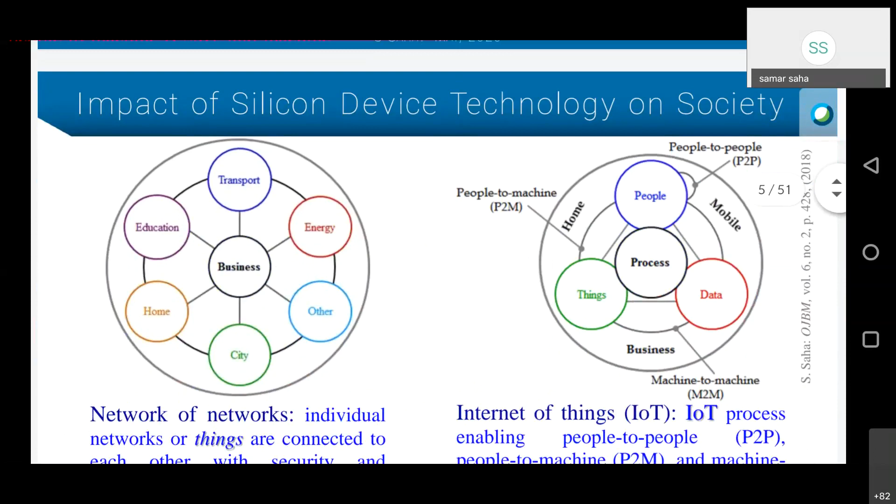So next page. This shows the impact of silicon devices on society. You see that the main theme is business. So business is connected to transport, to energy, then education, home, and then cities, smart cities. So all these things are interconnected. So we have a network of networks connected to the business and all important items, and that created Internet of Things or Internet of Everything.

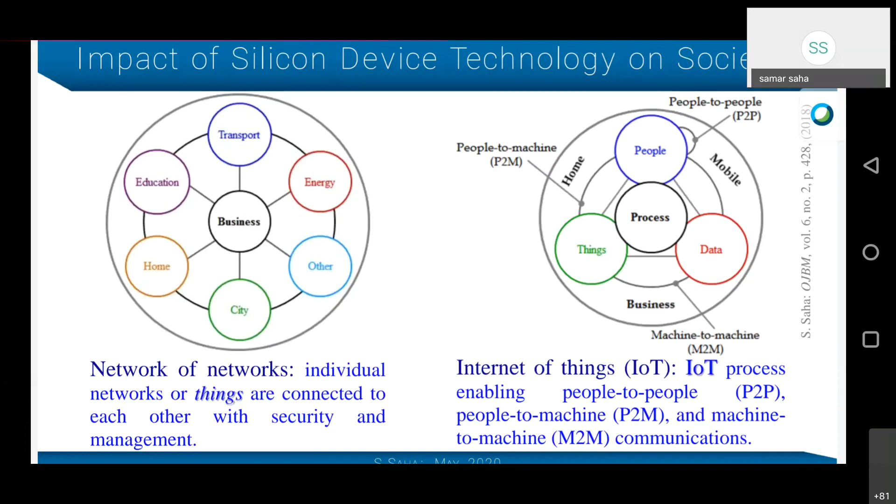So on the right hand view of the plot, we have process in the middle, then people, data, things. And it is connected to home, mobile, environment, and then business. So we have people-to-people communication, then people-to-machine communication, and then machine-to-machine, that means data and things, their communications. All these things started, which created, next page, an integrated smart environment and integrated ecosystem.

So just sitting on the smartphones, we can connect to any of these things. So this is a smart environment and integrated ecosystem. So all these are contributions of this silicon technology.

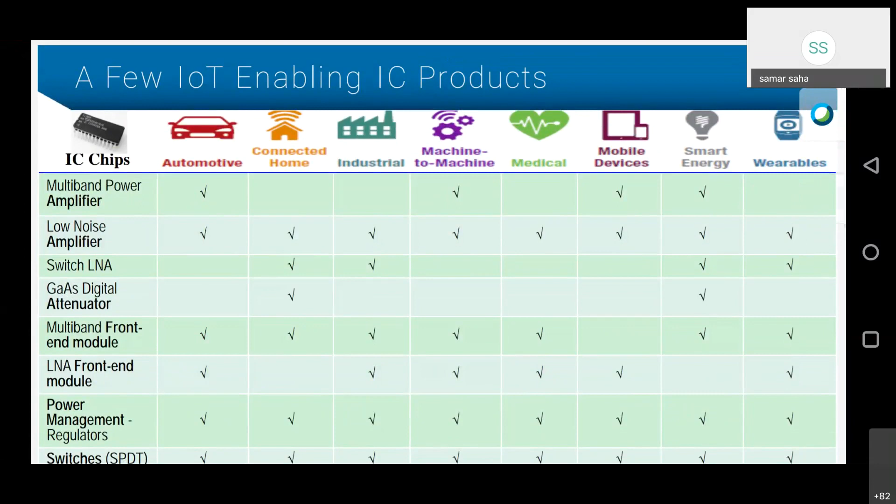Next page shows a few IoT enabling products. This is just for illustration only; there are hundreds of products. It says what are the IC chips that are used for automotive, then connected homes, that is smart homes, then industrial applications, machine to machine, then medical, then mobile devices, smart energy, and wearables. So these are all contributions of IC chips.

Though we talk more about Facebook, Google, the heart of these is the left-hand side, the IC chips column. That is, for automotive, what are the things that we need? Then for wearables, you have low noise amplifier. So these are all silicon technology, and then circuits and systems. These are few examples; there are 100 plus. So we can go through all the products coming out from the IC fab, and the circuits and systems design.

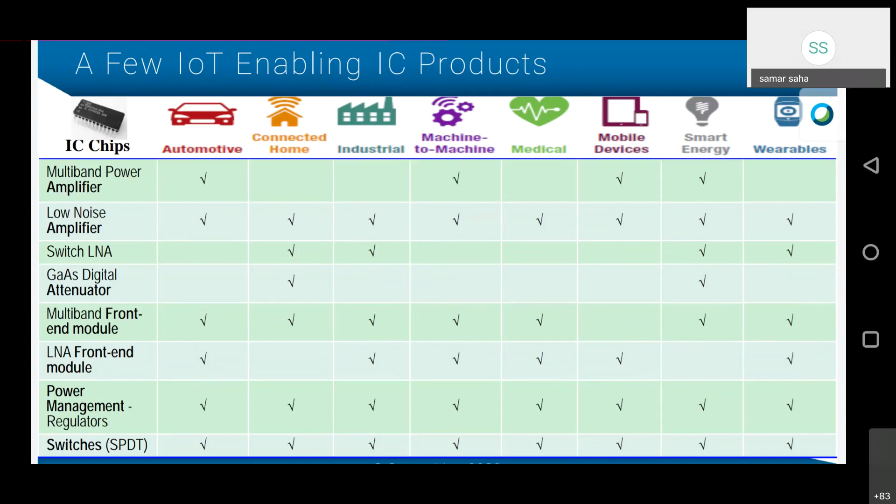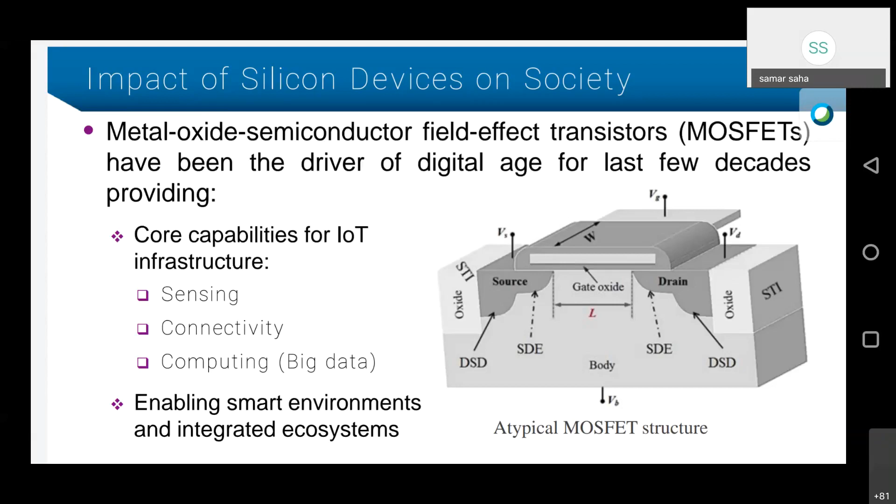On the next page we show that we are finished with that. Then we see what challenges these silicon devices are facing right now to continue the growth of the products for digital media. So on the next page we show

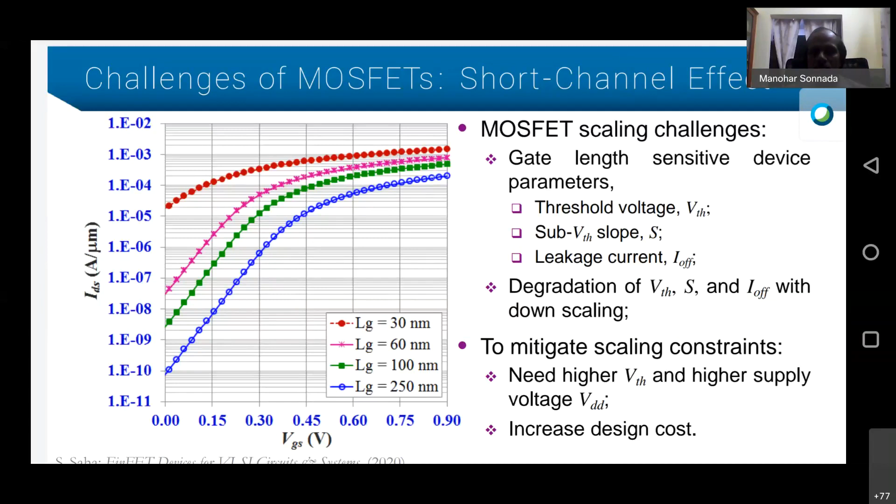To mitigate these scaling constraints, we need a higher threshold voltage so that we can control leakage current. That means we have to use more doping, and a higher threshold voltage means we have to increase the supply voltage, VDD. More doping is another problem, which increases design cost. A higher supply voltage means we will increase power consumption. Let's continue on the next page.

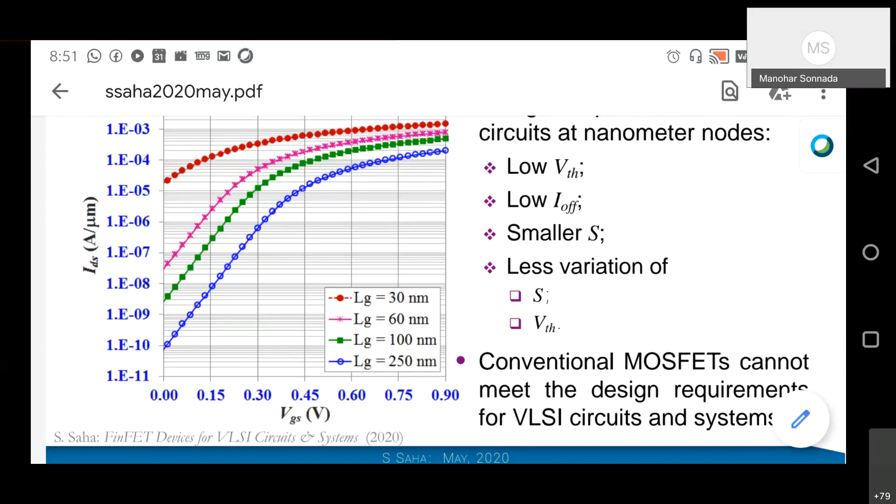So here we see that under those circumstances, with increasing channel length dependent parameters, MOSFETs cannot meet the design challenges. For design, what we need is low threshold voltage, low off-state leakage current, smaller subthreshold slope, meaning the swing should be very fast, and less variation of subthreshold slope. So conventional MOSFETs cannot meet the design requirements for integrated VLSI circuits and systems. So on the next page we show.

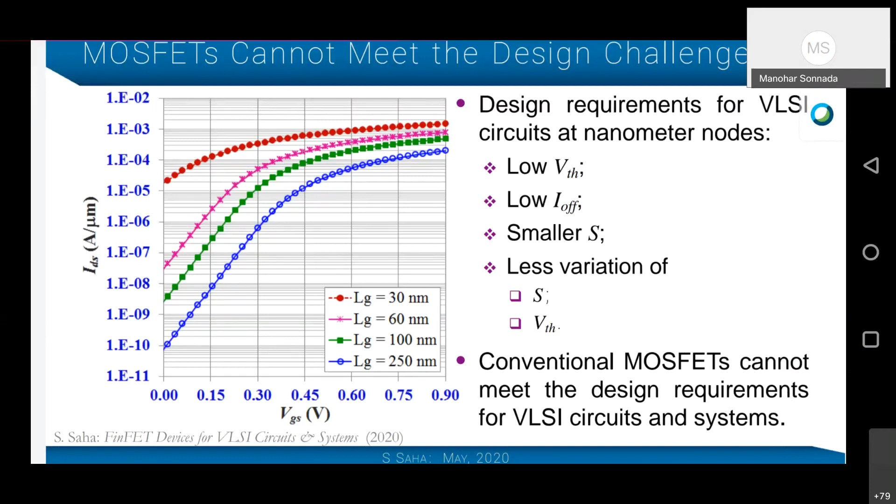So this page basically continues on the same theme. It shows why there is off-state leakage current. The gate is losing control in smaller devices because of the coupling between drain and channel, since the source and drain are in close proximity. As a result, CDSC, the drain to channel coupling capacitance, becomes dominant.

Sometimes it is comparable to the gate oxide capacitance, so the gate is losing control, and sometimes it could be higher. As a result, the gate loses control, and because of drain control we directly have higher leakage current. As we can see, the 30 nanometer device is basically a kind of resistor. We don't need any more gate voltage; just using drain voltage, we can turn on the transistor. So this is just a resistor. So the next page.

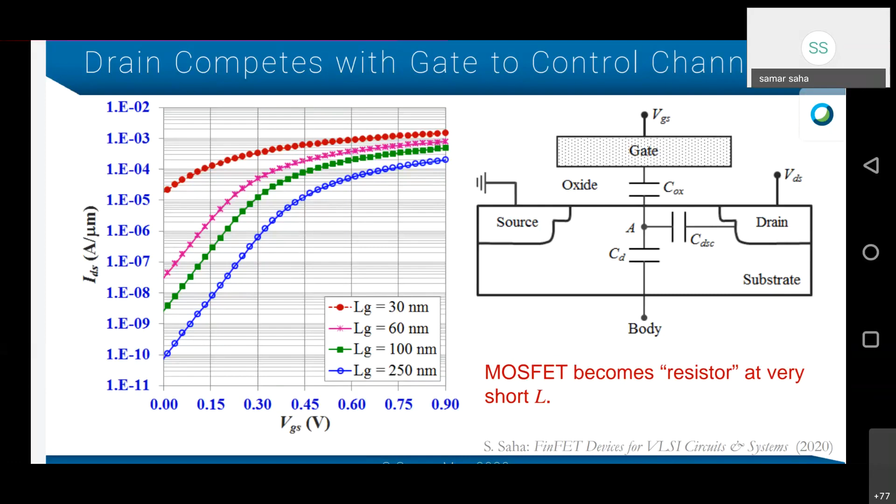The next slide shows that the gate cannot control the leakage path below the surface, that is, subsurface leakage. As a result, this is leakage directly from source to drain, which contributes to the off-state leakage current. So to make gate control of the channel better, what we need is the silicon body closer to the gate, suppressing the leakage currents in sub 32 nanometer devices. So on the next page.

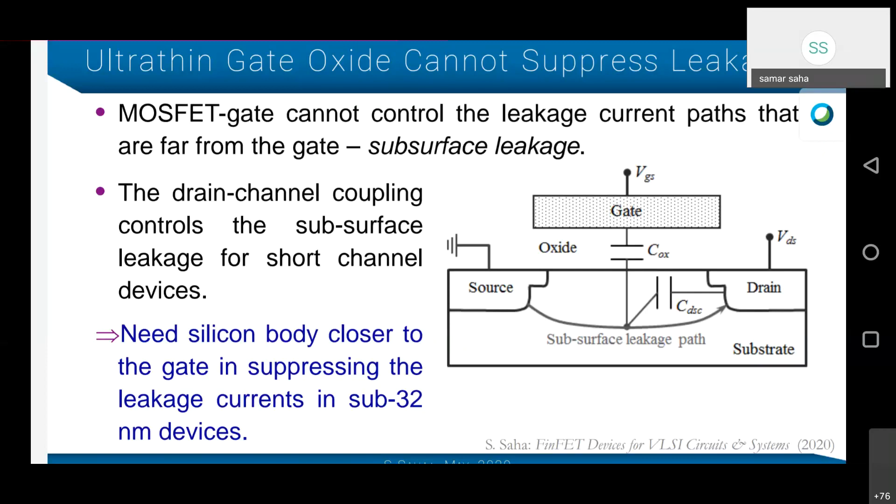So next page, as we said, to increase the gate control, or to decrease the leakage current, we have to increase the channel doping concentration. So there comes another problem, which is process variability, which is a major scaling challenge for the MOSFET devices.

So on these 3D plots, all these blue dots are basically dopant atoms. That could be coming from source/drain as well as channel, because we can calculate how many dopant atoms we have if we take about a 20 nanometer device, and then we calculate from the volume and the junction depth. You can see that for about 20 nanometer devices, the number of dopants or impurities could be

less than 50. So those 50 are basically discrete, and they can go anywhere, instead of continuous, as we are used to knowing that the doping profile is continuous. But here, because of this low number, this is discrete. So as a result, it causes random dopant fluctuations, RDF, or RDD, which is random discrete dopants. So these are discrete dopants. So that causes

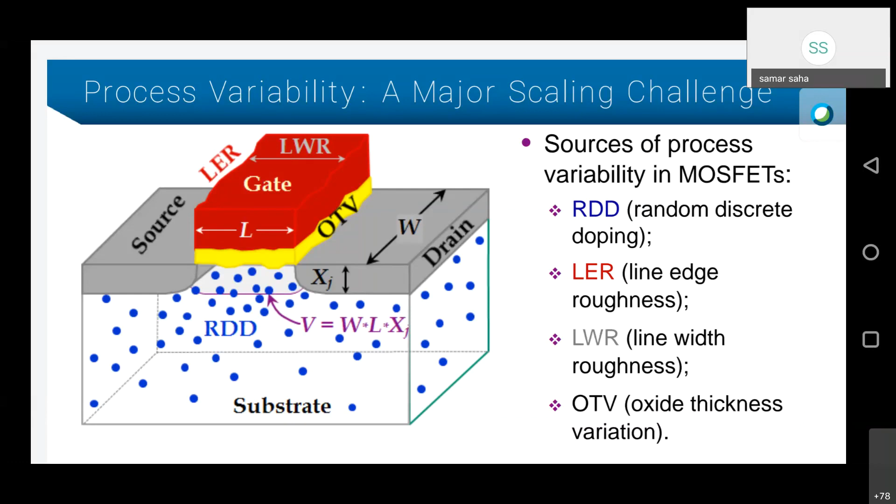threshold voltage variation. In addition to that, because of the lithographic process, we have oxide thickness variation, which is OTV. And with the same lithographic process, we have this rugged or rough edge. So that gives you line edge roughness and also line width roughness. So all these things come into play, which contributes to the variation of device performance. So next page shows the variations of device performance.

If we plot statistically the P channel on current on the vertical axis and the N channel on current on the horizontal axis, then you can see these are the on current distributions, whereas our design target has been these red dots at the center. So nominal data is the red dot at the center, and our data is all over the place.

So that puts a huge constraint on designers: how to design, and where to put your guard band so that you don't lose too much of your design. So that is a huge challenge for the design engineers. And so these are the contributions of scaling, or smaller devices. So next page.

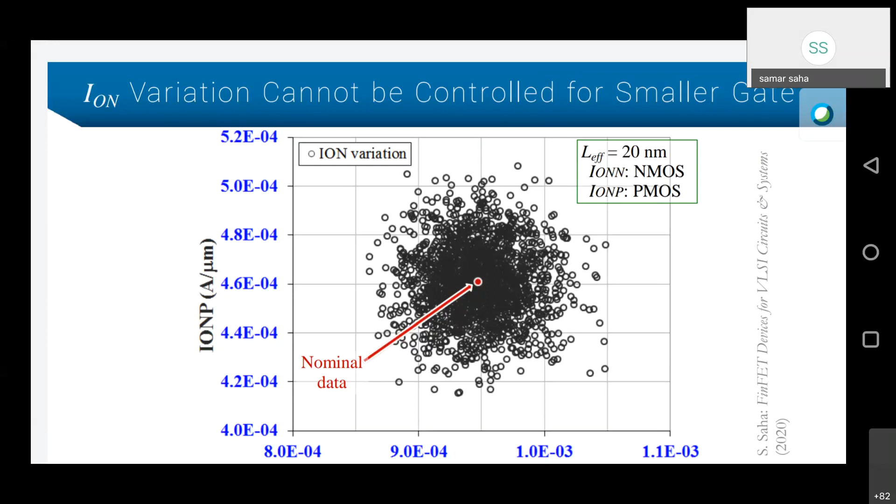So now to overcome the challenges, as we mentioned, we can go to ultra thin devices. So next page, we talk about ultra thin body transistors. First of all, we have to eliminate leakage current. So if we have an ultra thin body, as shown in the left 2D structure, we have the gate and this ultra thin body, and if this body is sufficiently thin, the subsurface leakage path, shown by this dotted curve, is cut off.

So we can cut off this leakage path as we thin down this T-silicon more and more, so all the leakage path is basically in the silicon dioxide, which is the BOX, or buried oxide, and in that way we can reduce the leakage current. And the plots on the right hand side show that as T-silicon is decreased, your off-state leakage current is decreasing.

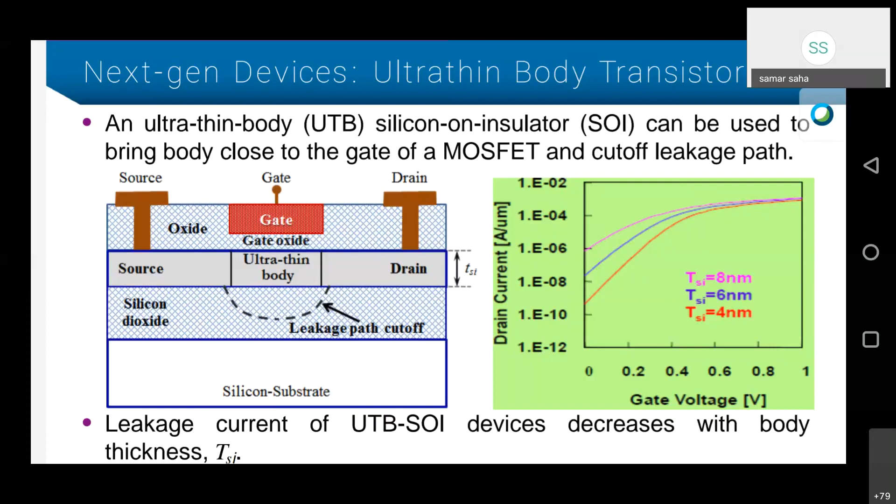So this is ultra thin body SOI devices, and on the next page we show that we can increase gate control by using two gates on this ultra thin body. That means we can use a top gate and a bottom gate. In this case, the subsurface leakage for the top gate will be taken care of by the bottom gate, and the subsurface leakage with reference to the bottom gate will be controlled by the top gate.

So this way we can have an undoped body, and at the same time increase the gate control. So this is a double gate MOSFET. And with the same idea, we can use a vertical thin channel, with the two gates on the sidewalls, and a thin body. So this is basically the FinFET, with source and drain on either side, and the fin is inside, oxide is shown on both sides, and the top is basically masking oxide, so we use that only as a configuration.

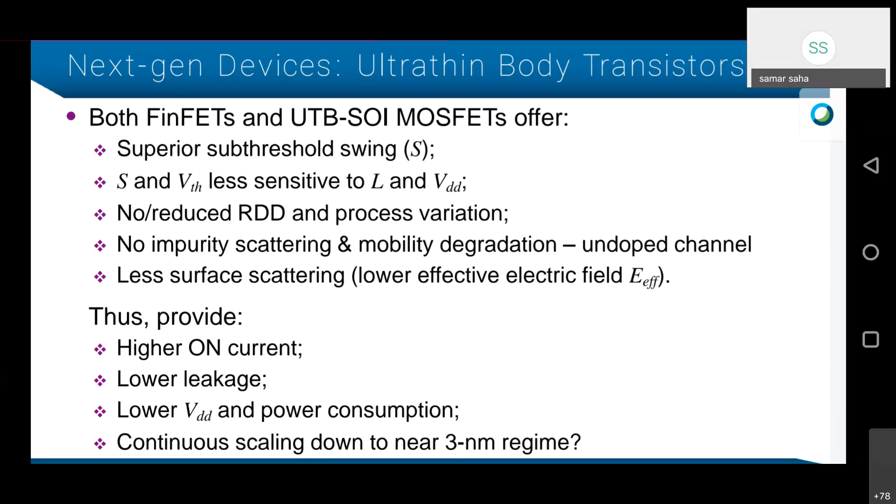Thus they provide higher on current, lower leakage, lower VDD and low power consumption, and then continuous scaling down to the ultimate limit, which is predicted at about the 3 nanometer region. So next page we look at.

Here it shows the double gate FinFET three-dimensional structure on the left-hand side, which shows all the parameters. T silicon is the thickness of the fin, and then source in front, and then drain at the back, and this gate, which is the red block. This is on SOI substrate, so silicon and then oxide, which is the SOI substrate.

And then if we take a two-dimensional cross section along X and X prime, here we see this 2D structure over the gate, so that we can see there's gate on both sides. So this is kind of a double gate structure if we rotate that. So gate on both side walls of the body, and then we have a silicon substrate, and then box or oxide. So this is on SOI substrate. Next page.

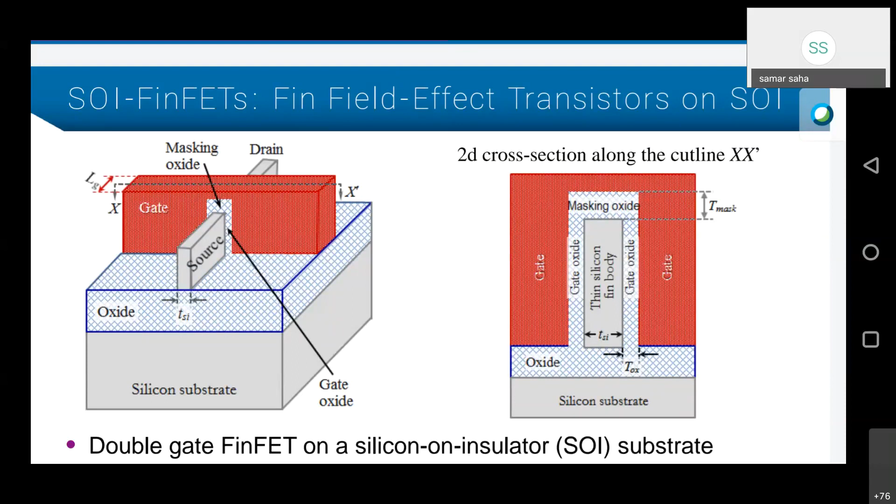So next page, this is bulk silicon, bulk FinFETs. We can prepare FinFETs on the bulk substrate also. So this is the silicon substrate, and its process is a little bit complicated because we have to have STI. This oxide is basically shallow trench isolation, to isolate the neighboring devices, and then again a 2D cross section over the gate.

So this is the 2D cross section of this 3D structure, showing the fin in the middle and the gate on both side walls of the device. So on the next page,

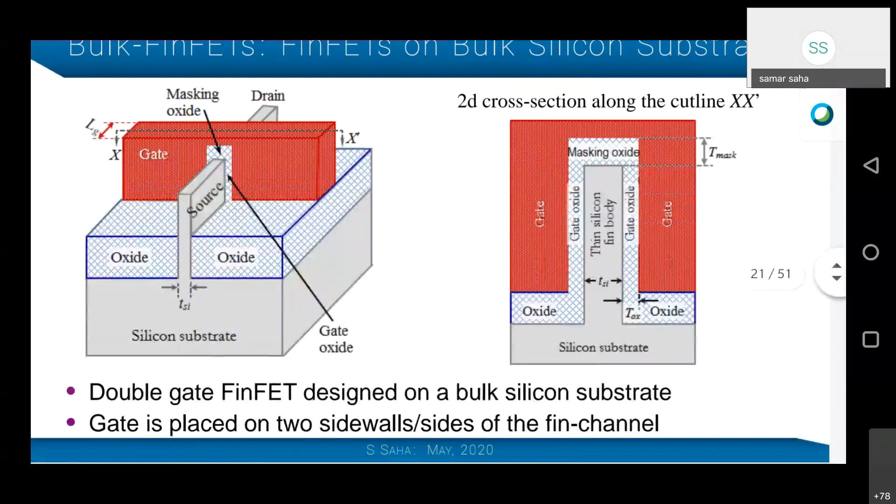this shows both devices. This is a triple gate. Previously we showed double gate, which means we had a thick cap oxide on the top. So now if we use the same oxide thickness on the side walls as well as on the top, we have a triple gate. So gate on the top and gate on the side walls. So that's a triple gate.

There are other options also that people use, but I will talk about only double gate and triple gate. So this is the triple gate device, one on SOI substrate on the left hand side and the bulk substrate on the right hand side. So on the next slide.

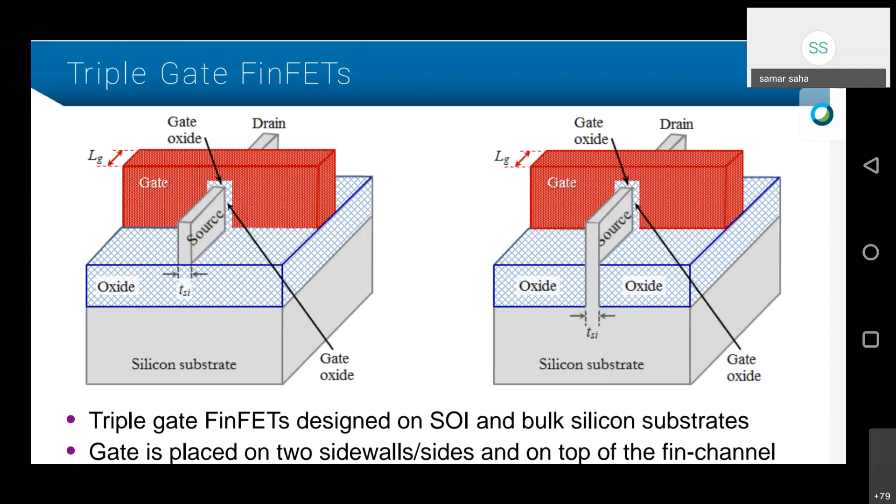If we're familiar with the MOSFET, the FinFET also has 3 modes of operation, that is accumulation, depletion, and inversion. So on the next page, there are just some calculations, that is, what is the effective channel length. The effective channel length is Lg minus delta L. Delta L could be whatever the source drain penetration is on the sidewalls of the fin. So this is effective channel length, effective channel width also the same thing, and then only effective

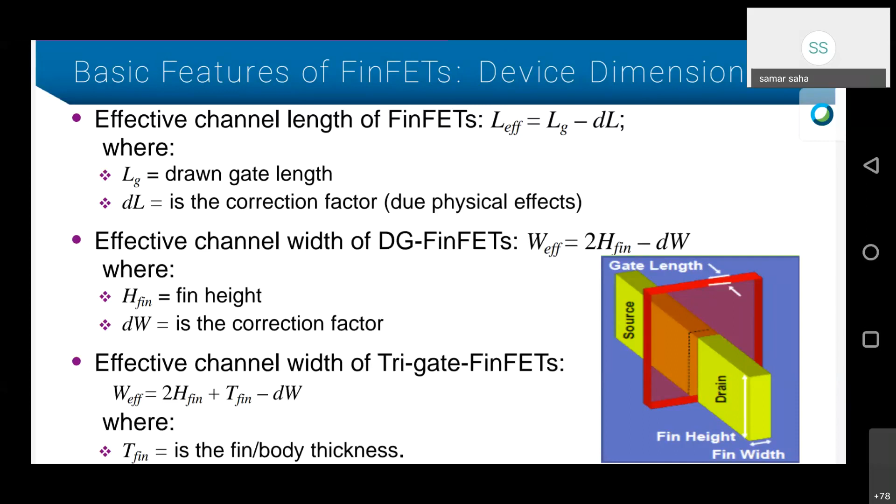channel width and the width of the FinFET. So if it is a single tri-gate, the effective width is 2 times the fin height, because current flows from the bottom of the fin to top of the fin, over the height of the fin, H fin. So our effective width is 2 times H fin, plus, if it is a tri-gate on the top side covering the whole thing, T fin. So this is tri-gate, and if it is double gate, only 2 times H fin minus whatever the encroachment DW. Next page.

It was first published in 1982, before patent examination, and then after patent examination, it was published in 1987. So it is in the public domain from 1982. But a lot of people don't know, because it's a Japanese patent, and I had a very hard time interpreting it with a lot of my friends from Japan. Ultimately, the patent was granted in 1993. So it took 13 years to grant this patent.

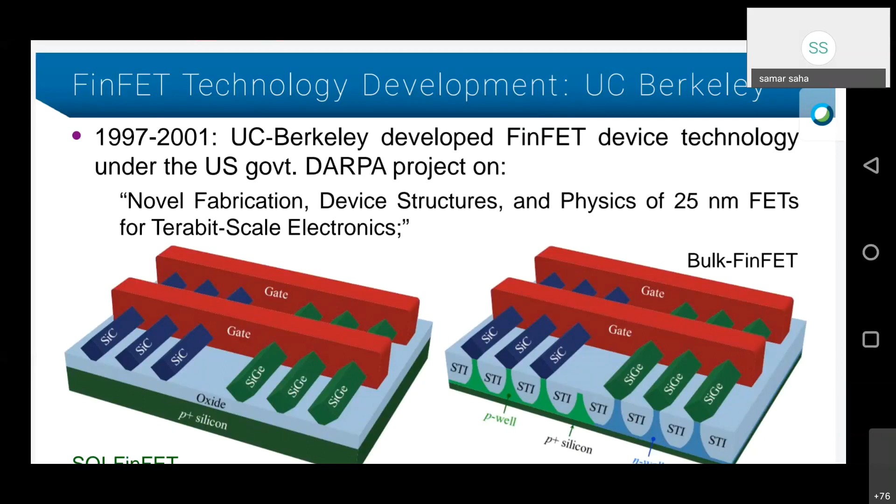During 1997-2001. And then at the bottom of this page, it shows it was adopted by Intel in 2011, and then followed by several other companies like TSMC, Samsung, Global Foundries, and so on. Next page.

So the transformation from MOSFETs to FinFETs is 2011. Intel announced to adopt FinFETs for sub-22 nanometer microprocessor technologies. And then later, more semiconductor manufacturers like TSMC, Samsung, Global Foundries followed Intel. And next page.

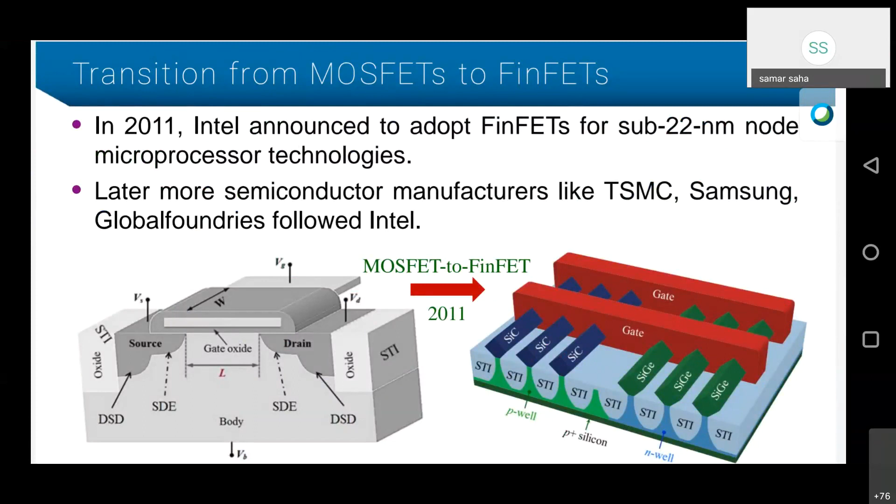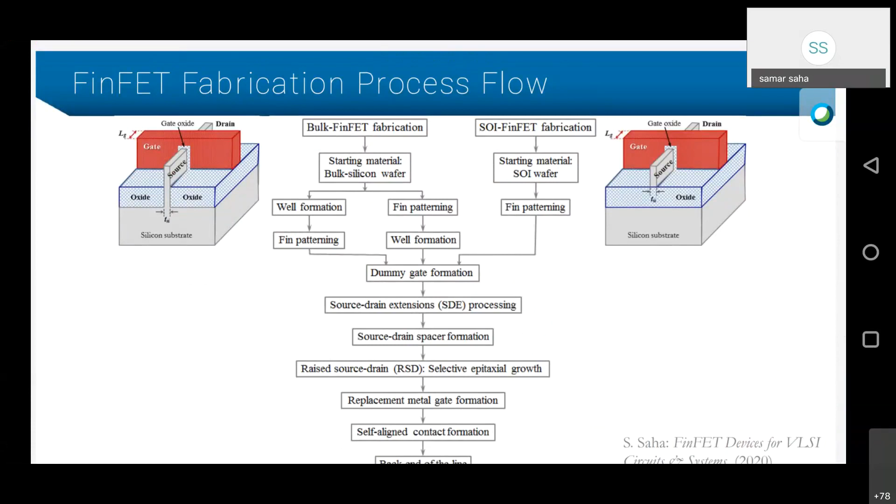Next page is just an overview of the FinFET process flow. For both bulk as well as SOI FinFET, the flow is almost the same. So first part is the differences. This is a bulk FinFET. The only difference is you start with a bulk silicon wafer as starting material, and then we have to do well formation because of the bulk fin. We have to have N-well, P-well formation.

Then we do fin patterning. But this also can be done in two different ways. First, we can do exactly the CMOS process, that is well formation, then fin patterning, or we can first do fin patterning, and then do well formation, then it follows the regular flow. In SOI FinFET, we don't have well formation. We start with the SOI wafer, do fin patterning, and then follow the process.

The process continues: form the dummy gate, then source drain extension formation, then source drain formation, with all the spacers. Then raised source drain formation. We are doing all this with the dummy gate. Then we have to do replacement metal gate, metal work function engineering, then contact, and then back end of the process. So this is basically the brief flow of the process.

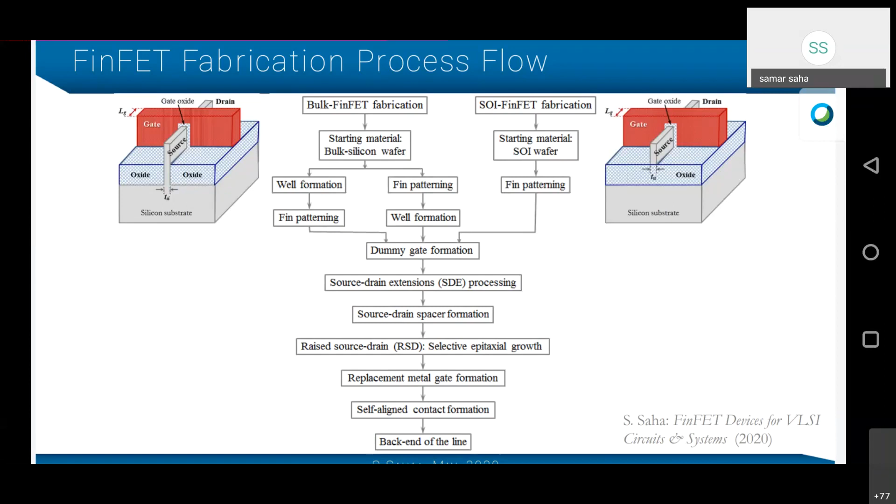But this is not that simple. In between, these are very complicated. The FinFET process is very complex, particularly for bulk FinFET because of the well formation followed by fin patterning. SOI is a little bit easier. We'll compare later on. So on the next page, we show just a few steps.

As I mentioned, we start with an epitaxial wafer. So this is P plus silicon, or epitaxial silicon. This silicon thickness defines the fin height.

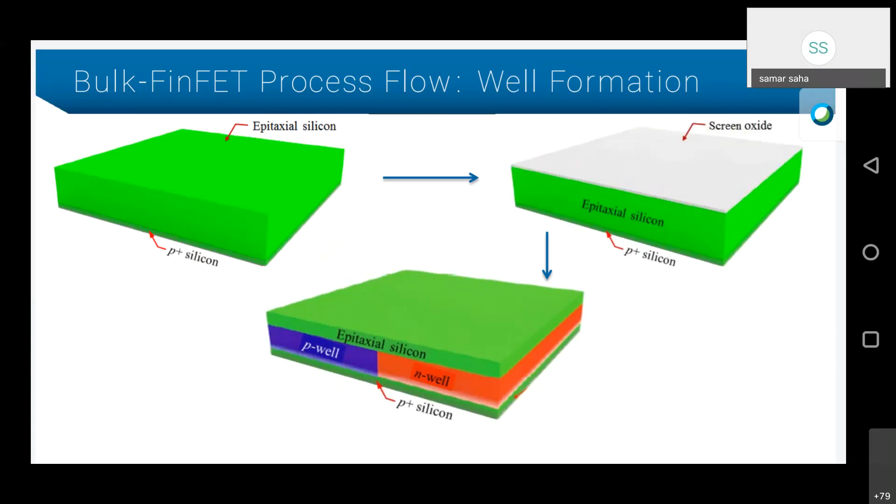So we select the epitaxial silicon layer so that this defines the fin height, depending on the requirements for design. Then from there we move to screen oxide, and then I skip a lot of steps. Then we form the P-well and N-well process, with implants and all sorts of things, cleaning and everything, for the P-well and N-well. And on the next page, we show how we form the fin.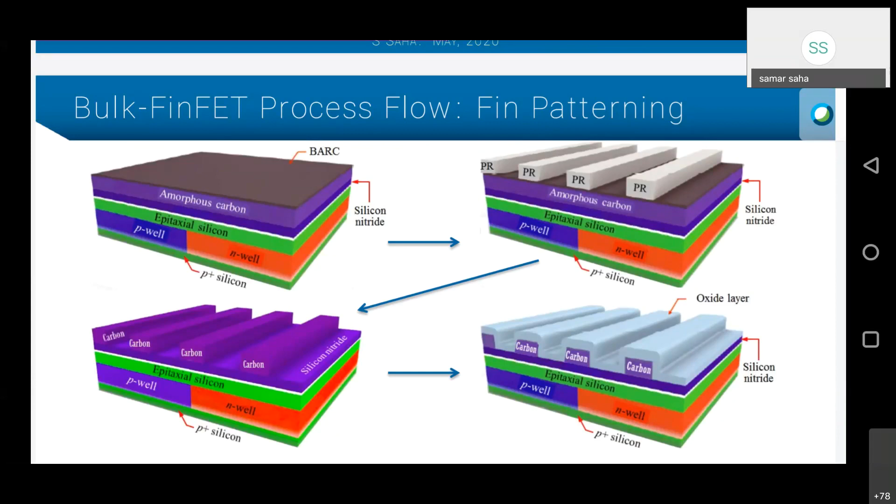So these carbon blocks we have, and then we do spacer deposition. This is on the bottom right hand side figure, which shows the spacer on the top. So this is actually the spacer defined technology for FinFET, also called the SADP process. So to define the fin, we deposit the spacer, and then do spacer etch on the next page. So we do spacer etch.

That leaves behind oxide spacers, and carbon is in between, right? So then on the right hand side, top 3D structure, we remove the carbon. Then we have left behind only the oxide spacers. These oxide spacers will define our fins. Then we move to the left 3D picture at the bottom, where we do further etch until the etch stops at the pad oxide, that white part.

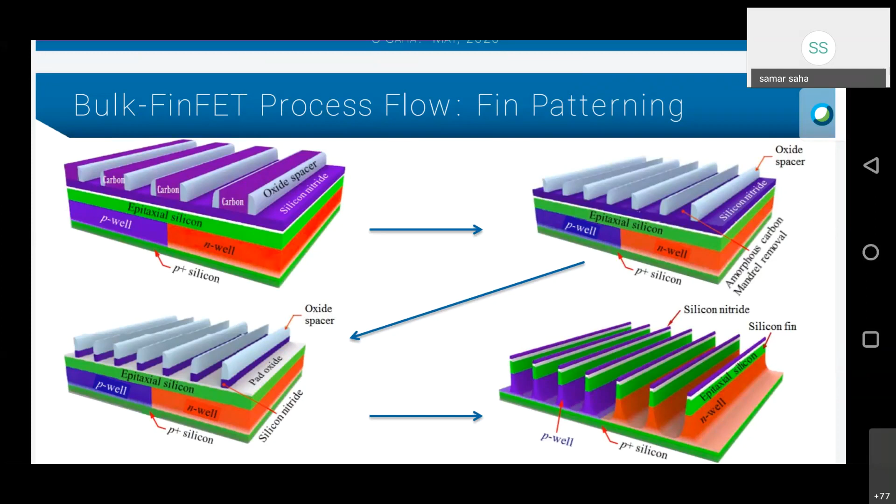And then we do further etch down to the bottom of the P silicon, epitaxial silicon. So we have this trench, and then on the next page we skip some of the steps, and we have a trench formation. After cleaning and removing and etching, we get this silicon fin. So in between there are a lot of processes.

So this is the silicon fin standing here, and then we have STI, and sometimes we have an odd number of fins. This odd number of fins you have to remove. So this is after fin removal. On the left hand side we have a P well, and on the right hand side we have N well. If you look at the bottom 3D picture, the P well will be formed on these 3 fins. NMOS will be formed on the left 3 fins, and PMOS will be formed on the right 3 fins. So on the next slide,

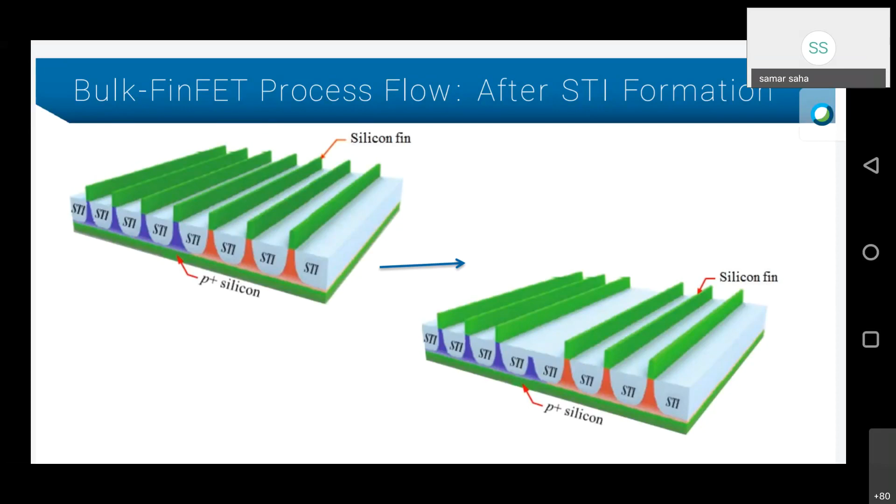after the metallization. Metallization is also a very lengthy process, because this gate is not that easy. You have to remove the dummy gate, then you have to etch it. We have a huge trench. Then that trench you have to fill, and etching and everything. These are all huge, complex processes. But anyway, I skipped all those, and this shows after formation of source drain.

So silicon carbide. These are raised source drains. I'm just talking about the middle 3D picture, that is showing the fins. Silicon carbide is the dark blue. That shows the raised source drain of NMOS, and the green shows the raised source drain for PMOS, which is silicon germanium. That is a stressor also, that puts stress on PMOS devices.

And then on the left hand side, it shows the 2D cross section of the fins just under the gate. On the left hand side is the P well. Then we have the undoped fin. It is a little small in this 2D structure. We have a bottom interface layer of oxide. So we use high K dielectric, but before the high K dielectric, we have to use a thin silicon oxide interface layer.

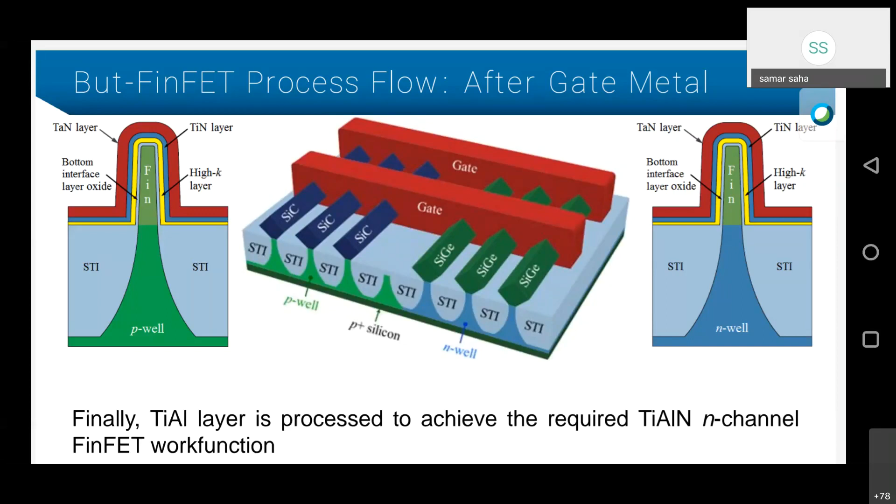Next page, we'll come to the end very soon. This actually compares. As I described before, the only difference in bulk and SOI FinFETs is the starting wafers. In bulk FinFETs it is a complex process flow because it requires N and P well formation, requires STI formation to isolate neighboring devices, and so it's challenging to control fin height. Fin height has to be controlled, and there is no etch stop layer to control fin height.

But on the SOI devices, it is a simple process. Process flow is very simple. No need for well formation, no need for STI formation. So fin height is very easily controlled because we have the oxide as the etch stop. Any etching that you are doing, it will be stopped there. So it is easy to control fin height, and that reduces variability of

FinFET devices. But here variabilities will be large because each fin you cannot control, and if you use multiple fins for a device, each fin will have variability in height. As a result, that will contribute more variability in bulk FinFETs. But on the other hand, bulk FinFET technology is the same CMOS technology; it is complex, but we can run on the same line, while SOI FinFET has an expensive wafer cost.

So there is a lot of debate about which one is better, whether we go to expensive wafer cost or go for a complex process with low cost. So on the next page.

The next page just shows some device characteristics. These are high performance devices. On the left hand side, the transfer characteristics, IDVG, and on the right hand side, the IDVD characteristics. These are very high performance devices. This gives the total current. And so we go to the next page.

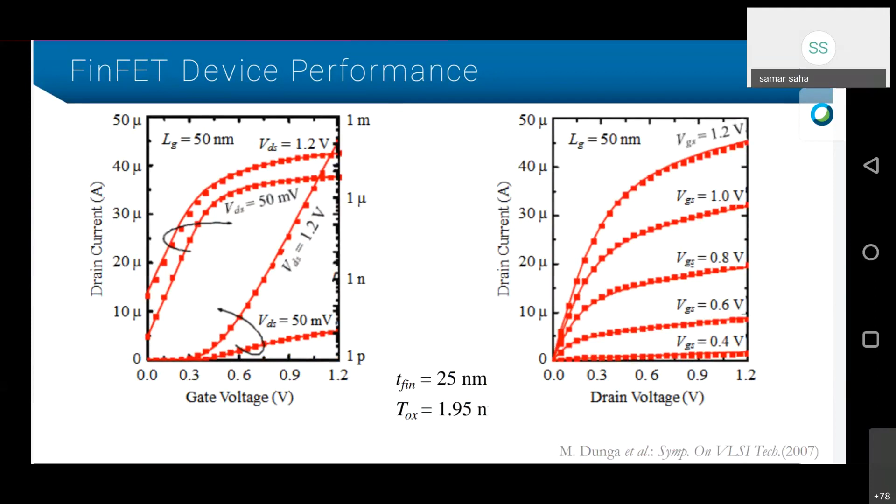We'll just overview some conventional transistors also. FinFET has a lot of challenges. I described them in my book in chapter 9. All these things will take a long time to discuss. So let's just overview on the next page some conventional MOSFET devices with advanced channel engineering.

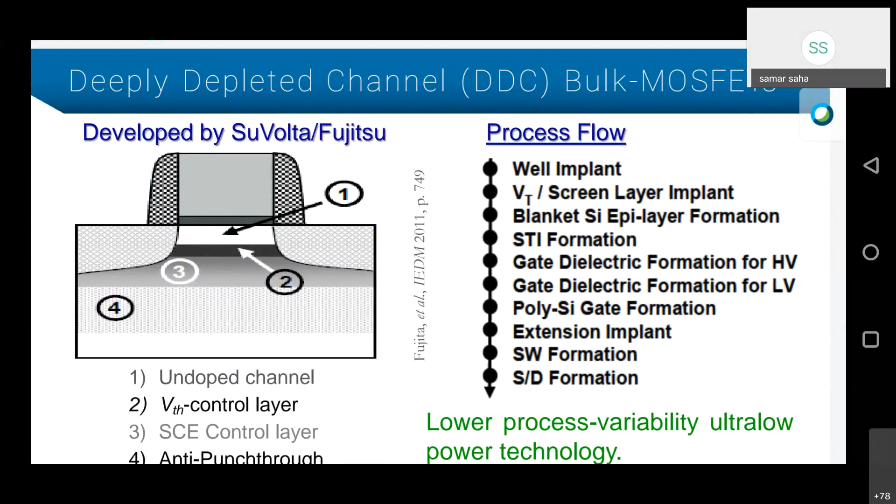There was one device which is a deeply depleted channel. This was developed by SuVolta and Fujitsu, and this technology is already used in the iPhone, starting from iPhone 8. So what is this technology? This is actually an undoped channel. It shows on the left hand side the 2D structure.

Number one is the undoped channel, that is white, number two is the VT adjust, threshold voltage adjust layer, number three is the short channel control layer, and number four is the anti-punchthrough layer. These are different layers. They're implanted first, and after that we do the undoped epitaxial layer, which is one, and then all these layers may up-diffuse, and that forms the channel. So this is an engineered MOSFET device.

Since it is undoped, it gives lower process variability, and this can be used for ultra low power technology also. That's how it is used in the iPhone, starting from iPhone 8. So on the next page.

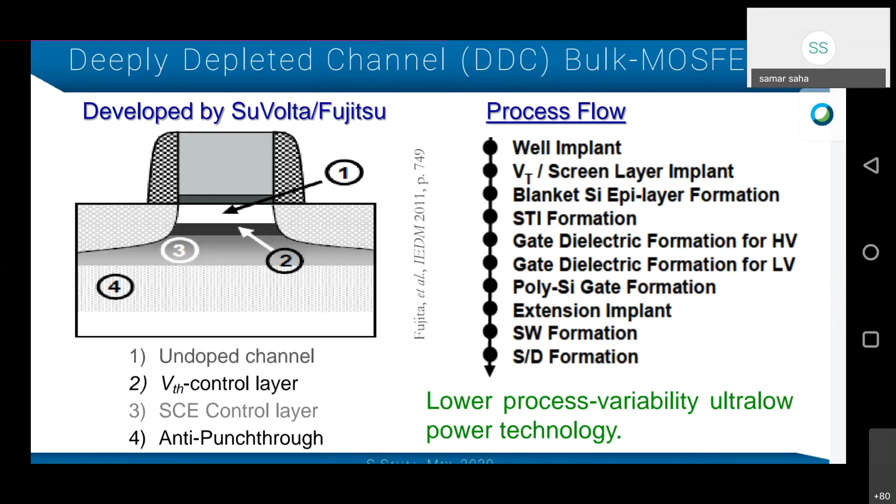On the next slide, we show another device which is also undoped. Here, instead of doing what SuVolta's technology did, halo devices are used. So a double halo MOSFET. What we do here is use two halos; all the implants, that means halo, optional channel threshold voltage implant, P well, N well, all these were implanted before using a dummy gate like the FinFET process.

After all the implants except source drain, clean up the surface, and then deposit the undoped epitaxial layer, and then let all the implants up-diffuse from the bottom. So that forms halo layers from the deep surface, with this undoped layer near the surface.

So that actually gives less variability, and it is also ultra low power, and it can be used similar to SuVolta's devices, but it is a little bit better than DDC devices. DDC devices also have some issues because of the heavy doping at the bottom. But here the halo is heavily doped, not that heavily, since it is up-diffused. So this is not that heavily doped a layer; it is actually a graded layer. So that actually has an advantage.

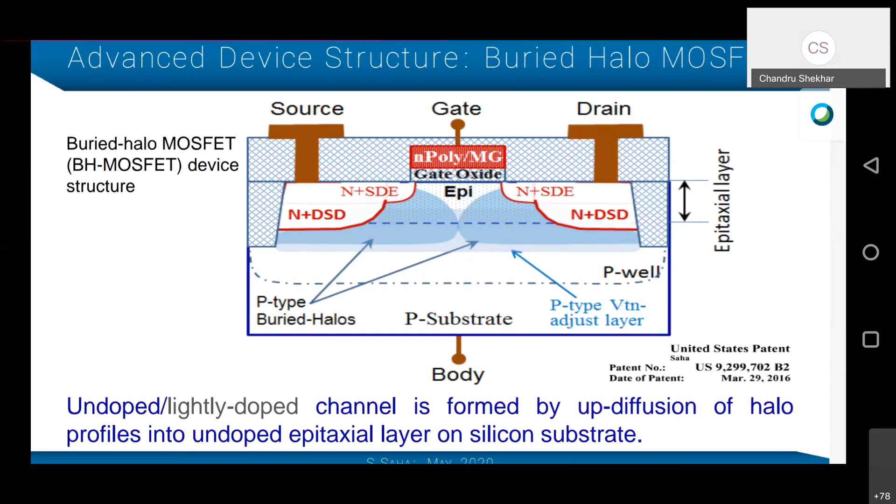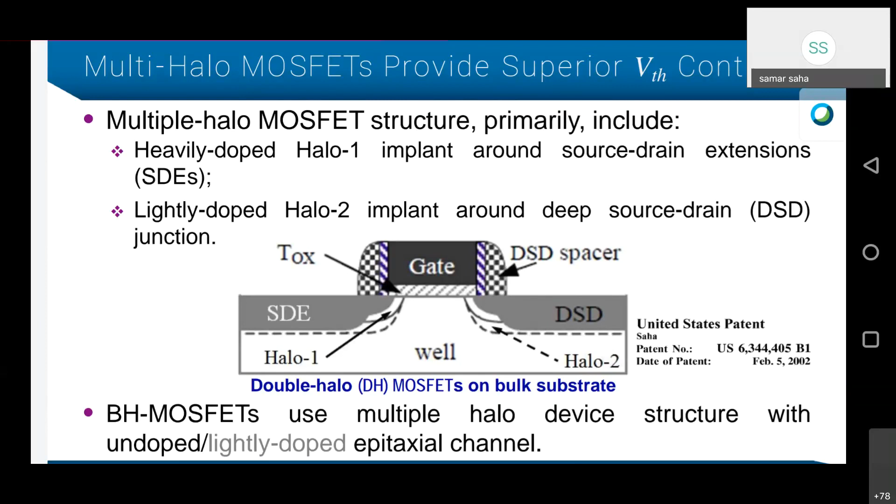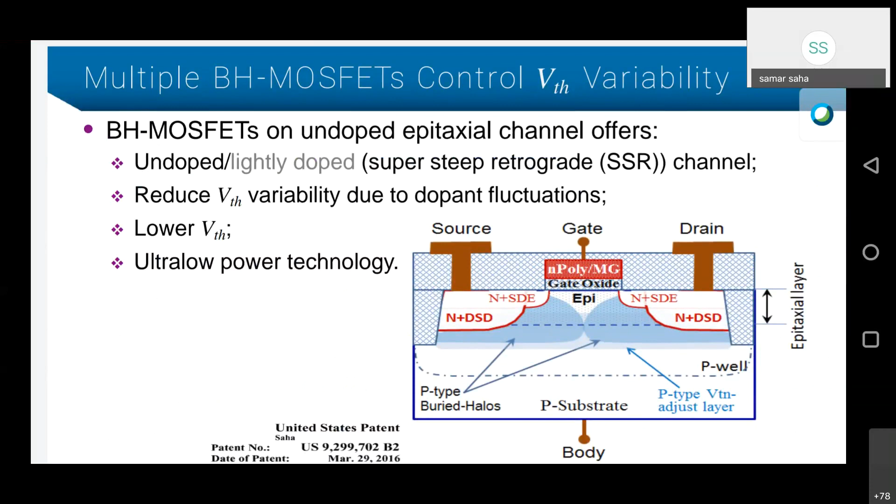And if we go to the next page, this is the concept used for double halo, buried halo MOSFETs. For buried halo MOSFETs, we use the same concept. Then after that, we use the epitaxial layer, an undoped epitaxial layer, in the structure. So this is even better than the original double halo MOSFETs. This buried halo is better in that respect. And on the next page, we will show some device characteristics in the next few minutes.

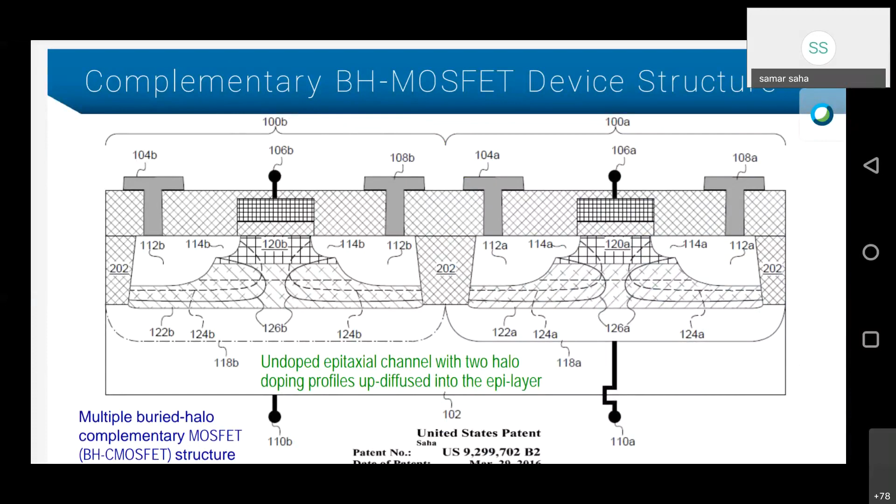So this is actually the complementary structure that shows NMOS on the left hand side and PMOS on the right hand side. That is the sketch that is used for the patent. And then we go to the next page. The next page shows some process structure, some process flow. So on the next page.

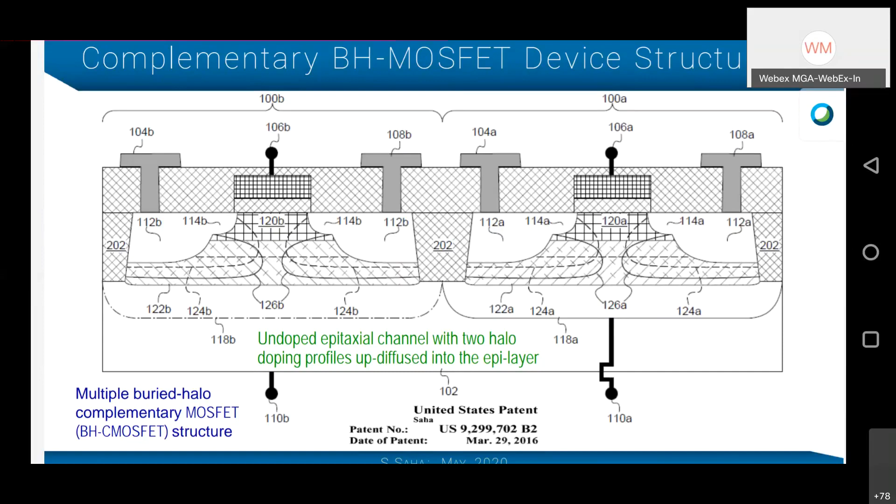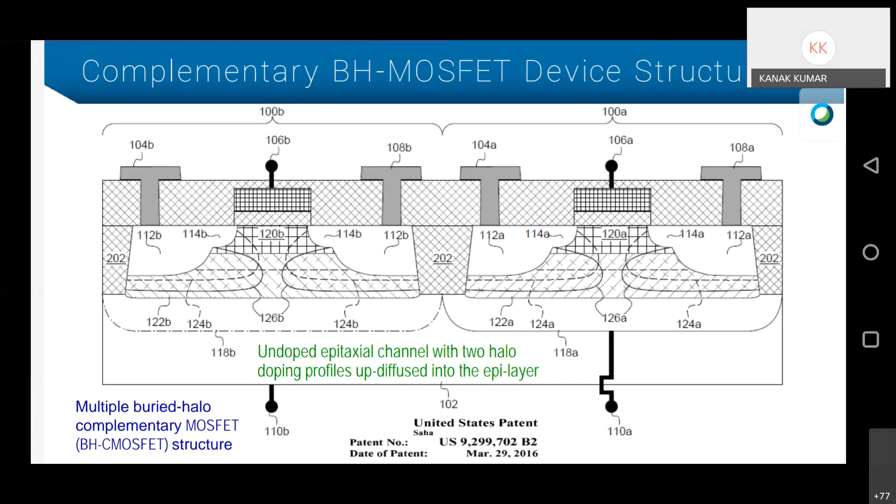Hello, Dr. Saha. Your voice is not audible. Oh, okay. So can you hear me now? Yeah, now we are able to hear you. Oh, okay. Actually, I think the screen was frozen for a while. Yeah, please. So actually, you can go to the next page. Hello, Dr. Saha. Good evening, sir. Can you please share your PPT? Pardon me? We will be sharing these recording videos with you. Please mute yourself. Let him finish the presentation. Okay, sure. Okay, sir. We will wait. Okay. Have the control. Yeah, Dr. Saha, please proceed. I have changed the slide.

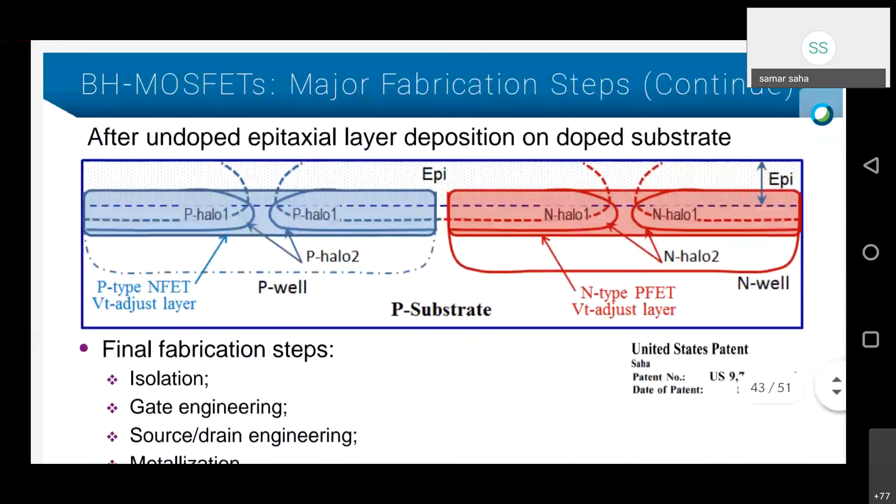And then the next page shows that after all the implants, we clean up the surface of the wafer, and then we do undoped epitaxial layer deposition. This shows the thickness of the epitaxial layer, and then all the implants will up-diffuse to the top, but the surface will still be undoped. And then the final fabrication steps below the 2D structure show you have to do isolation, then gate engineering, source drain engineering, and then metallization. And then next slide.

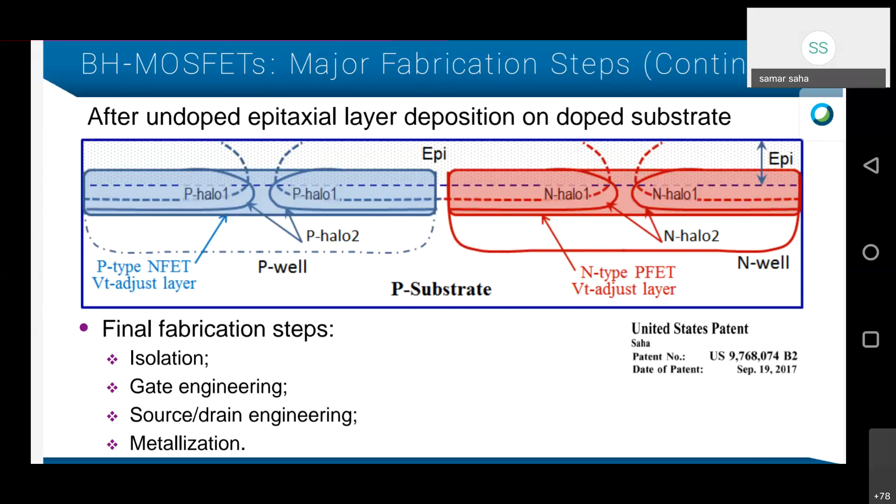So this is the final structure. We have seen the patent structure in black and white. So this is basically the same structure. And then we can move on to the next page.

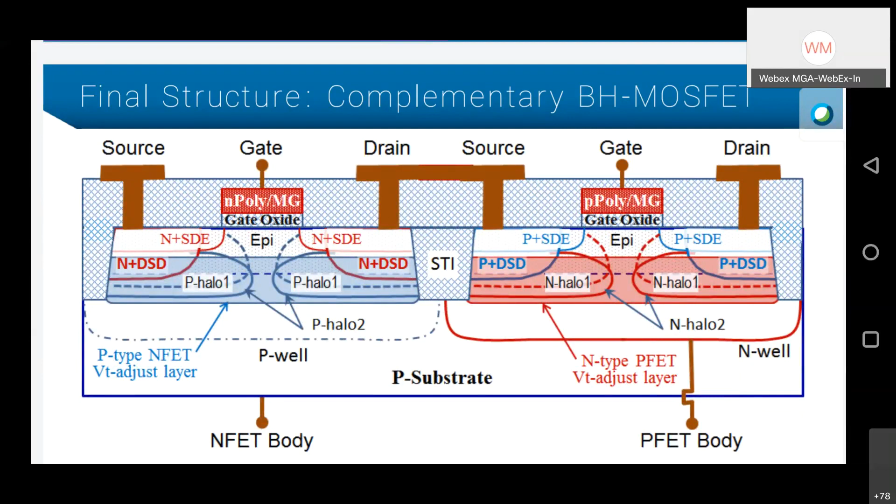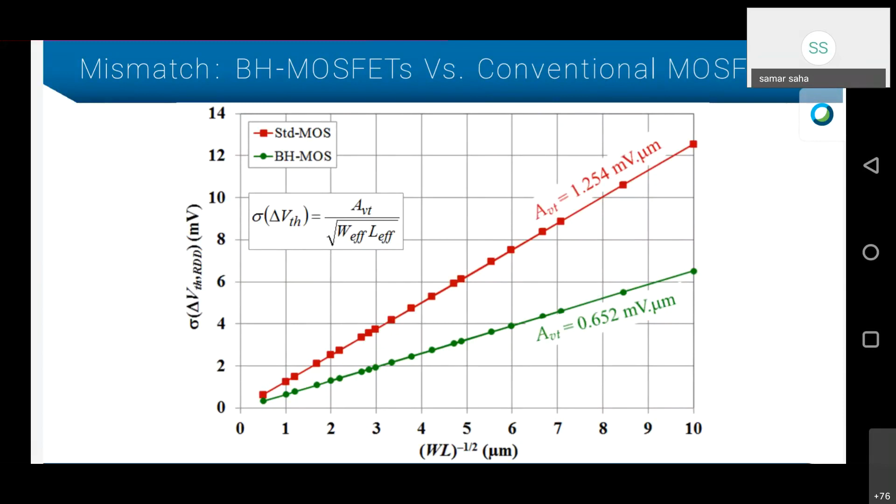So this is just to check how the variability is doing, because this is still a bulk MOSFET. If we compare with a bulk MOSFET, variability is basically measured by the coefficient AVT. That coefficient is higher for the bulk MOSFET, and with this double halo or buried halo MOSFET it is just half of it. And then the next page shows the threshold voltage is controlled.

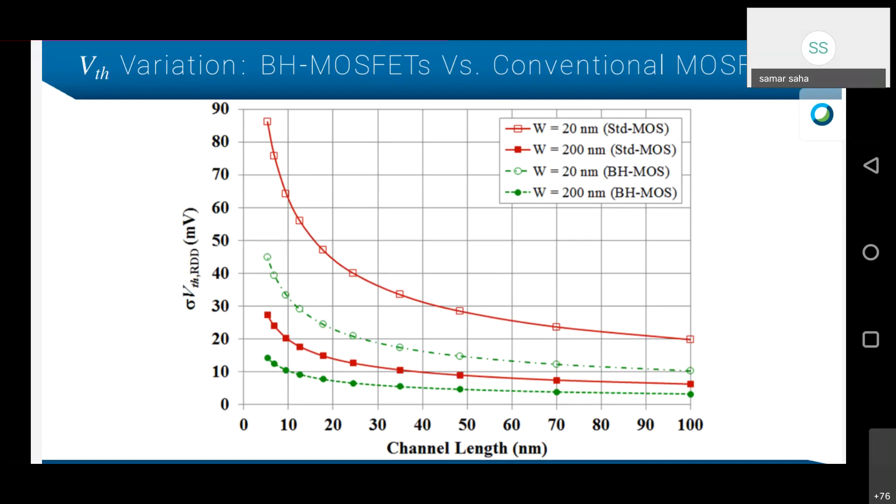The next page shows the variation of on current, that is on current distribution for both N MOSFET and P MOSFET. This shows the global and local variation. The outer squares show the total variability, global plus local, the blue shows only global variation, and then the Monte Carlo local variation only is shown by the inner circles.

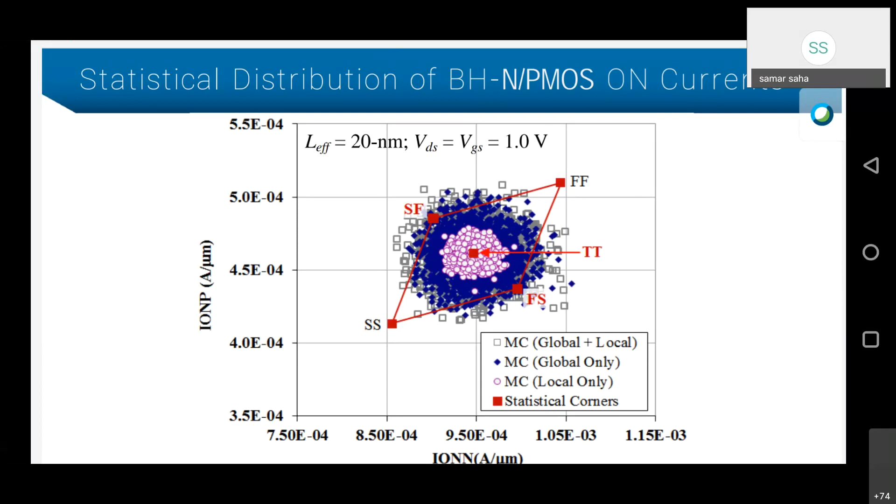And the typical and all the corners are also shown: at the center TT, the typical corner, then fast corner, slow corner, and all the different corners. So this shows that it is well controlled, and the statistical model plus regular model actually coincide very easily. That is, we can use either the statistical model or the regular model to model this technology. So then next page.

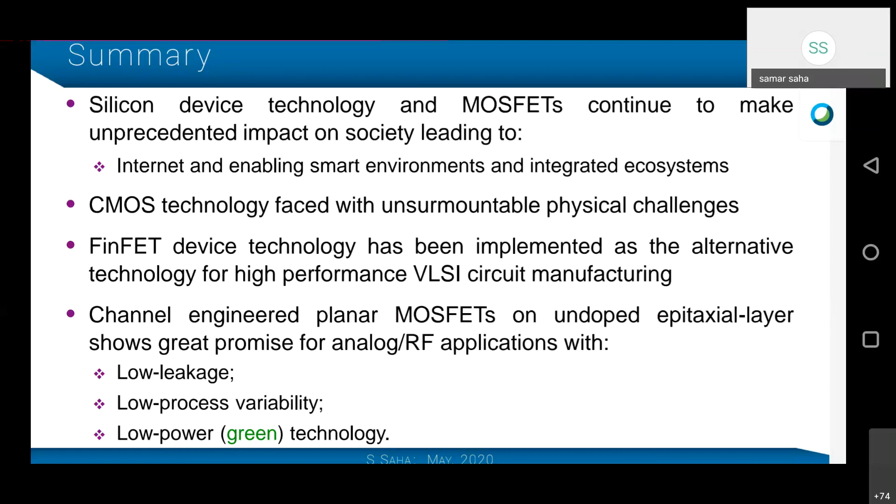manufacturing. Channel engineered planar MOSFETs on undoped epitaxial layers also show great promise for analog RF applications, particularly the technology I described, buried halo, which is low leakage, low process variability, and low power. Both SuVolta's technology as well as buried halo are low power, low variability, green technology. So with that, next page.